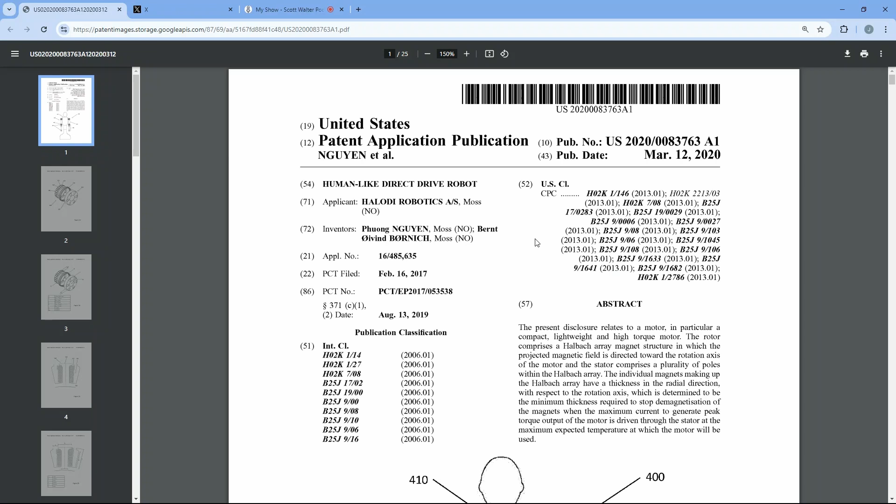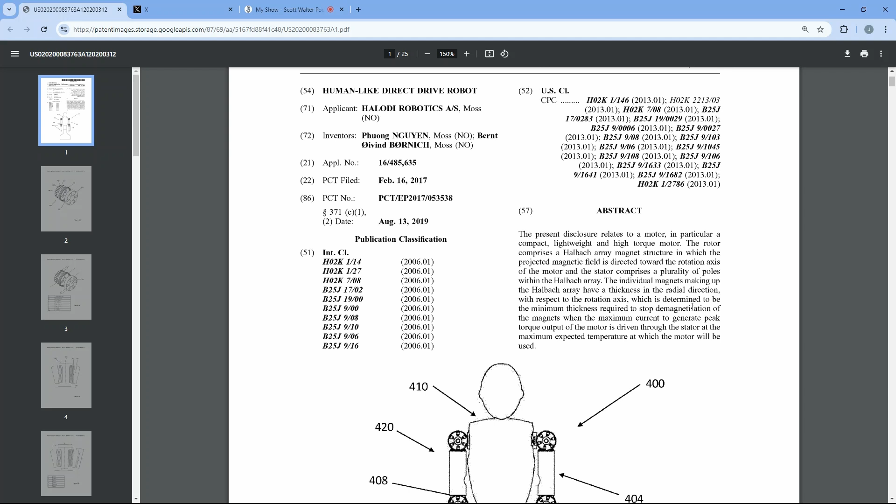Okay, so here we have the patent description, and it actually details quite a lot of different things. A lot of times the abstracts are kind of misleading - you get one idea of what's going on, and it turns out there's even more description than just the abstract. So the first thing they do is show an outline of what a humanoid bot would look like, and get into a description of a lot of figures looking at the actuators.

So they really go in and describe what they mean by a direct drive actuator. Direct drive, you would think, means there's no gears in there - but they're talking about anyone with a gear ratio below 1 to 10. I believe their gear ratios are much less than that, maybe like 1 to 2 or 1 to 3 or something. So it's like, well, that means you've got some sort of transmission or gearing in there. There's other ways to get a quote 'gear ratio' that doesn't require gears, which I think we're going to see in a minute.

But the main thing is they're trying to come up with a high torque actuator, using both a rotor and stator where they have permanent magnets, trying to figure out the best way to configure this to make it as efficient as possible. So they go into a big description of how you have to set up the magnets and everything, and what thickness the magnets have to be to make sure you don't get demagnetization - because if the motor runs too hot, your permanent magnets may lose magnetization, demagnetize on you, and then it doesn't work anymore. So you've got to have controls to make sure the thickness is enough that this doesn't happen.

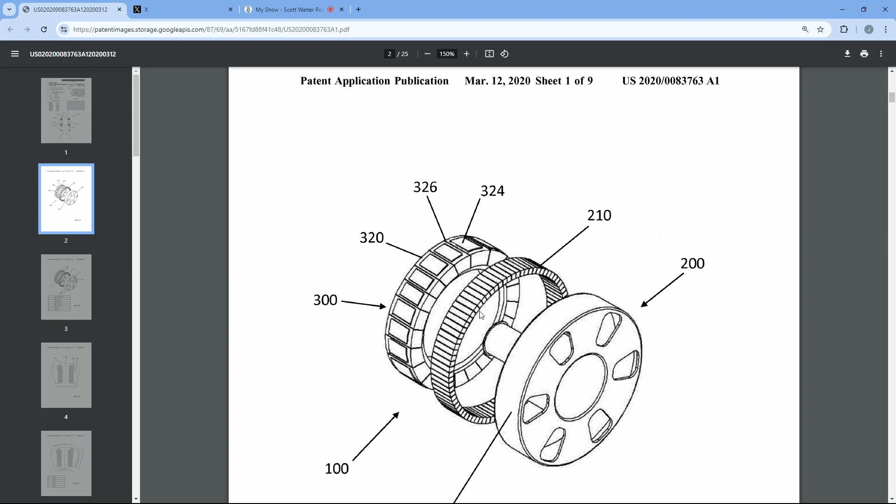One of the tricks they've done is they're using for their rotor something called a Halbach array. The Halbach array is basically, if you take a bunch of small permanent magnets and stack them all together, you can create a much bigger magnetic field. And the magnetic field is going to be on both sides of that strip - so basically you're aligning north to south, north to south, north to south, all the way along there.

A lot of the magnetic field ends up on one side where you don't really need it. You'd like to get it all on the other side. It turns out if you take permanent magnets and rotate them about 45 degrees when you stick them together, so it's not north to south pole but off a little, you end up creating a stronger magnetic field on one side of the plane than the other. That's the idea of a Halbach array.

Another problem they have to worry about is that most high gear ratio motors get their torque by spinning at a very high RPM and going through a differential of 1 to 100 to get really high torque. Because of that, the magnetic field looks very smooth to the spinning motor. But when a motor is spinning really slowly, the magnetic field is kind of lumpy, not perfect all the way around. It's more like a sinusoidal wave.

If you look at it, it almost looks like a gear, and so you get these two different magnetic fields trying to push against each other. It's not pushing smoothly - there's a little bit of catching, and as you get moving a particular way it'll pick up, but it's not a smooth torque. This effect is called cogging, almost like thinking of gears and cogs in a wheel where things stick.

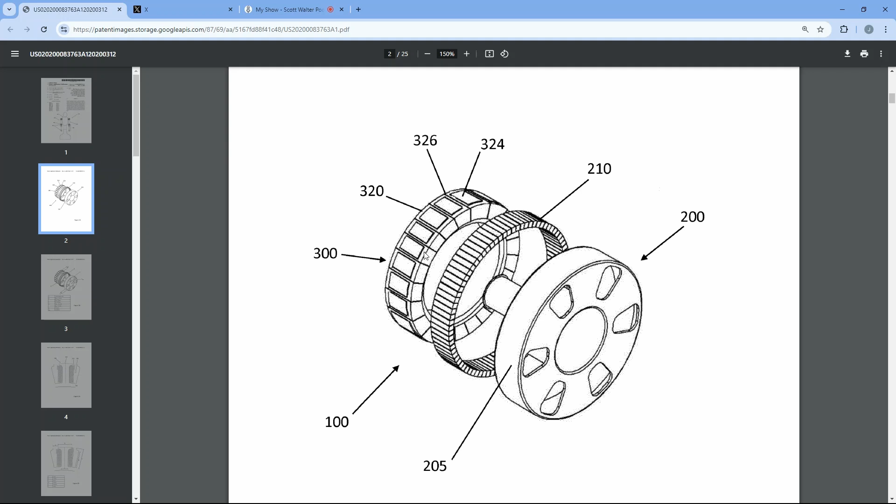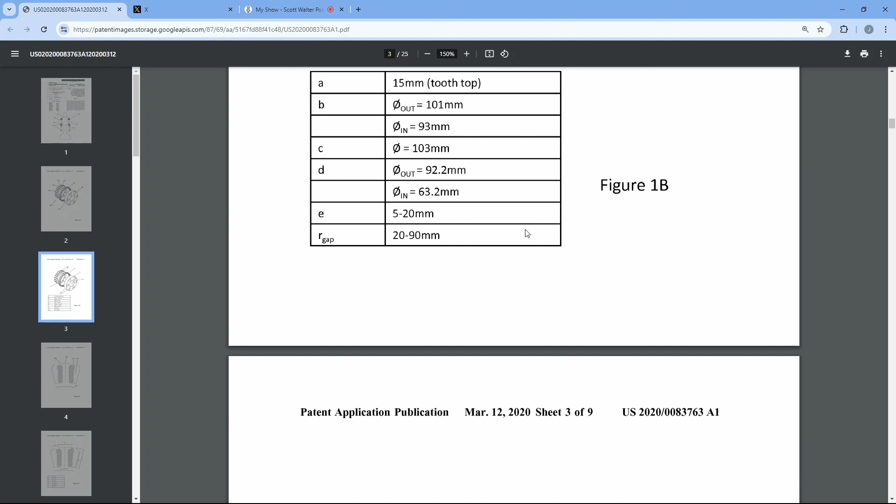They go through a lot of the different designs they tried, to make sure they come up with the optimized set of magnets and radii and amount of material to get the actual torque they want to have.

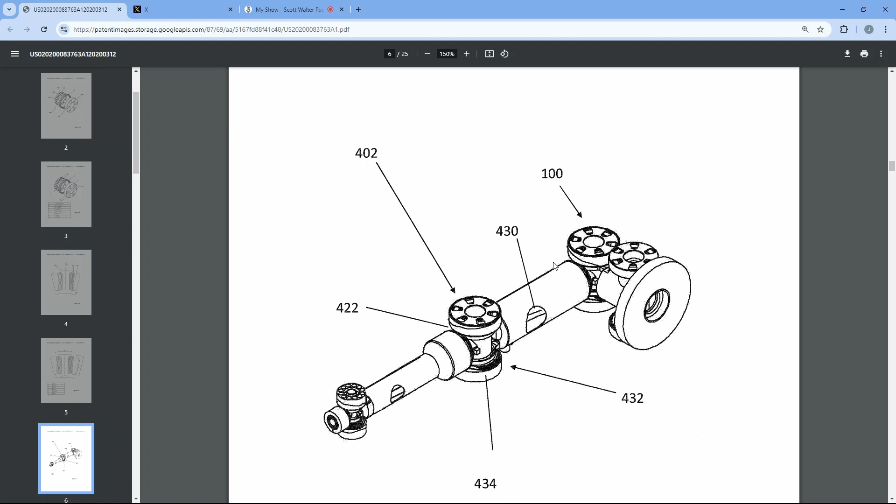At some point there are more details on exactly what they need to do in the stator, how the windings are done. Anyone with a good degree in double E will probably understand a lot of it. But the main diagram I focus on is: okay, how do they actually arrange these things to make the arm move? What's the arrangement going on here?

This is what's typical in a lot of patents - a graphic they put in which reveals just enough information to receive the patent, but not too much for anyone to really figure out what's going on. So you have to look behind the scenes to get an idea and try to imagine what's going on. There's a description of everything going on here, and I'm going to show a 3D mock-up of this.

The first thing I want everyone to see is, over here where my cursor is spinning around, this is where the shoulder is. Then here are two actuators - this is not a joint, these are actual actuators, a top actuator and a bottom actuator, that using a tendon drive will actuate this particular joint over here. This joint consists of 2 degrees of freedom: one going vertical along here and the other one along here.

It's kind of hard to understand in my description alone, which is why I'm going to build a 3D model to go along with it.

But the big thing is that where you think the joints are, or if you think there's a motor driving it at the joint, you were wrong. It's actually driving the next one. And we're going to see a lot of the advantages of being able to do something like that.

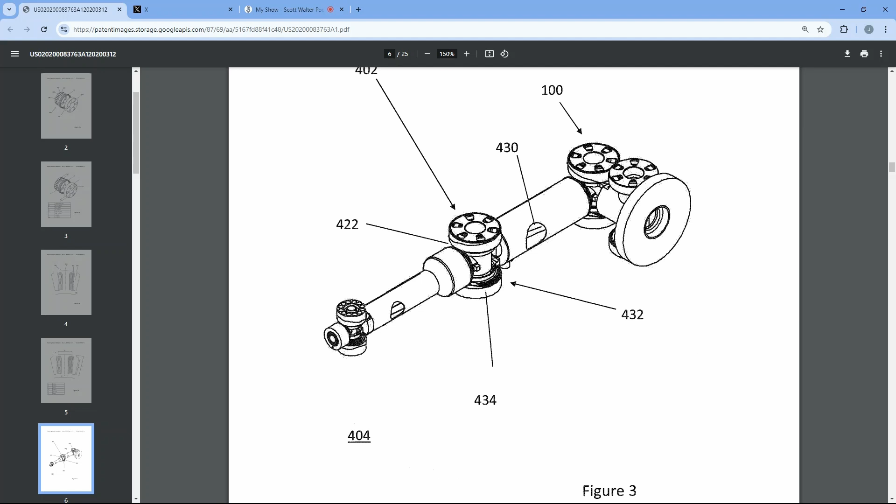So now what I want to do is switch over to a 3D model. Let me just stop for a second here. I'm going to bring the model up right now. So I took this in there to get an idea of what's going on.

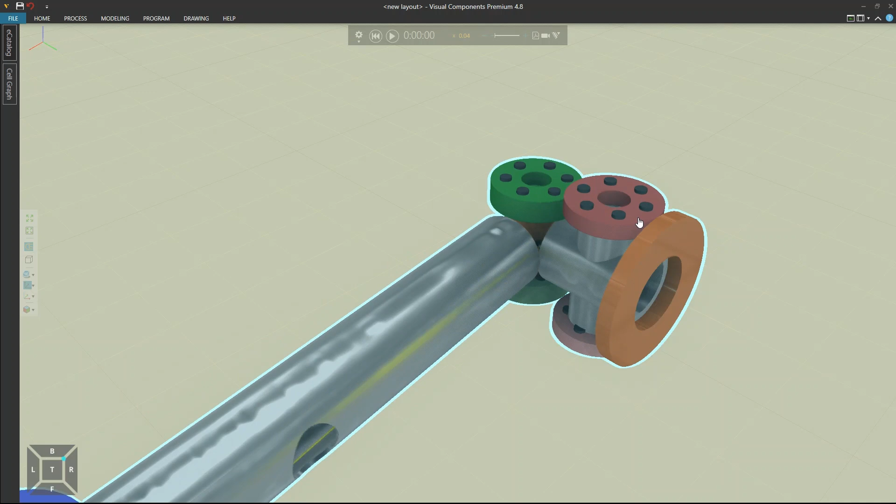So again, if we look up here, I have this pair of red actuators, top and bottom, which are going to actually cause the motion over here on the shoulder joint. And what happens is you can move this particular motor, and it's actually connected to what looks like this joint here.

Now you see this green, what looks like an actuator moving there. Well, the actuator isn't actually moving. What's happening is the joint is moving at that point. It's causing the joint to move, and it's being done because of the tendons that go through a series of pulleys here to make that move.

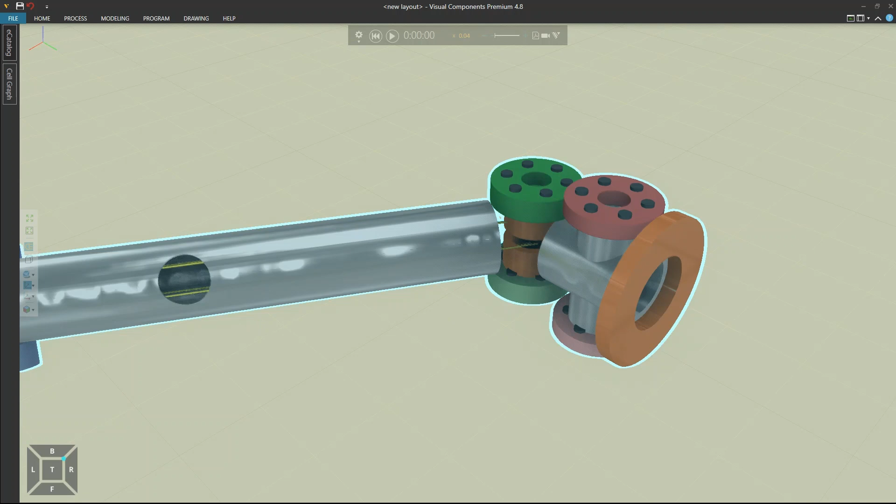Now, depending upon the kind of movement you do, if you just move one of these motors, you'll get kind of a compound movement. There's some other magic going on here that's not fully modeled. But basically, if you synchronize both of these red motors, the dark red at the top and the light one at the bottom, so they both move together as they go around this spool here, it causes the arm to do a pitching movement.

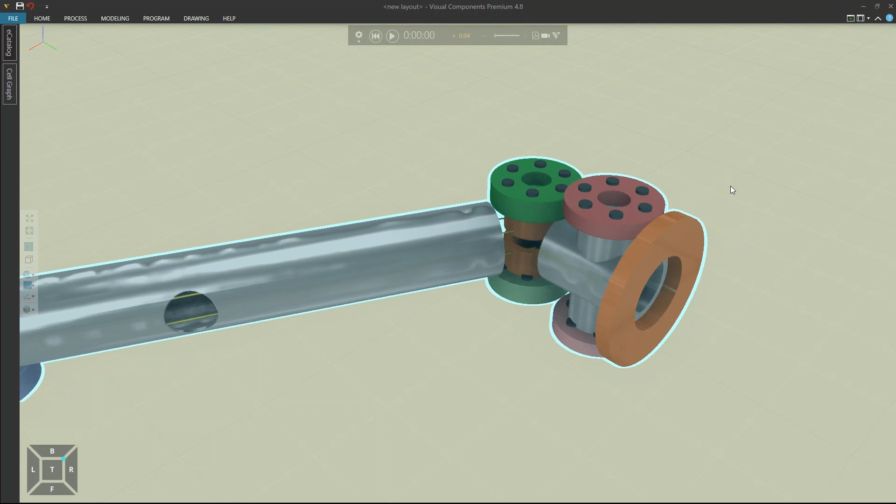If I set it up so that these two motors actually move counter to each other, so when one goes clockwise, the other goes counterclockwise, set it up right, what you will see is that when they go in the opposite direction, they cause this to roll.

So yeah, the motor for actuating this joint is not here, it's here, it's not there. The green motor is actually what is used to actuate the elbow.

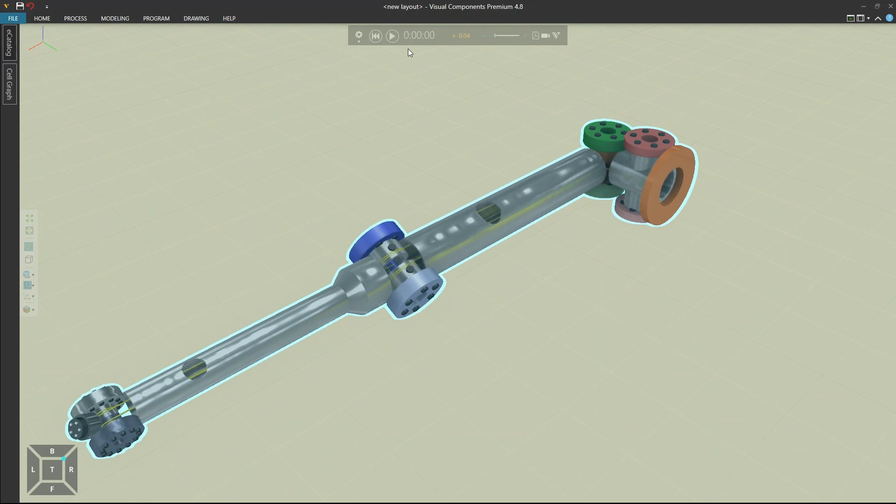So now I'm going to take the green motor here, and the top is going to move clockwise and the other one counterclockwise. And you'll see what ends up happening is like you're expecting movement here, you're getting movement way down here. So you see when they go opposite, it causes the wrist to roll.

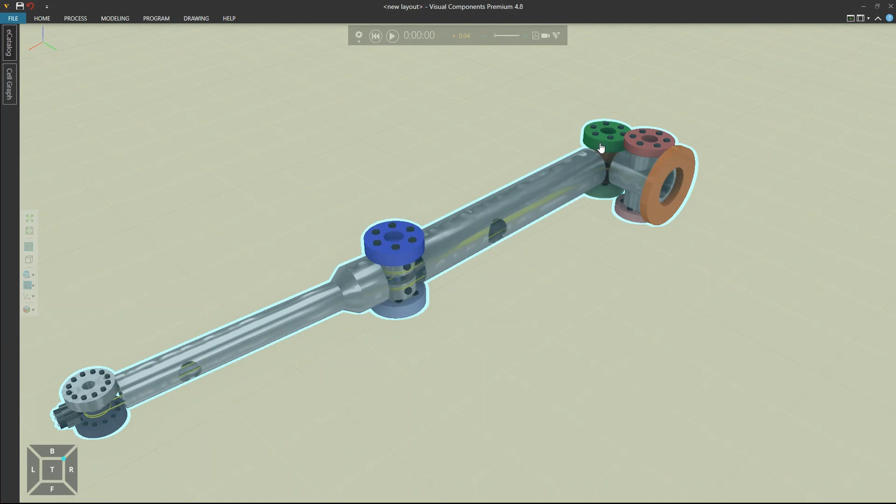And when they go synchronized together, it actually causes the elbow to move up and down. Basically they have a split joint here where the tendon that's wrapped around the actuator up here comes down and gets wrapped around this. And if it only pulls on this one, only that one's going to rotate and you don't get the full rotation—it causes it to roll about this axis.

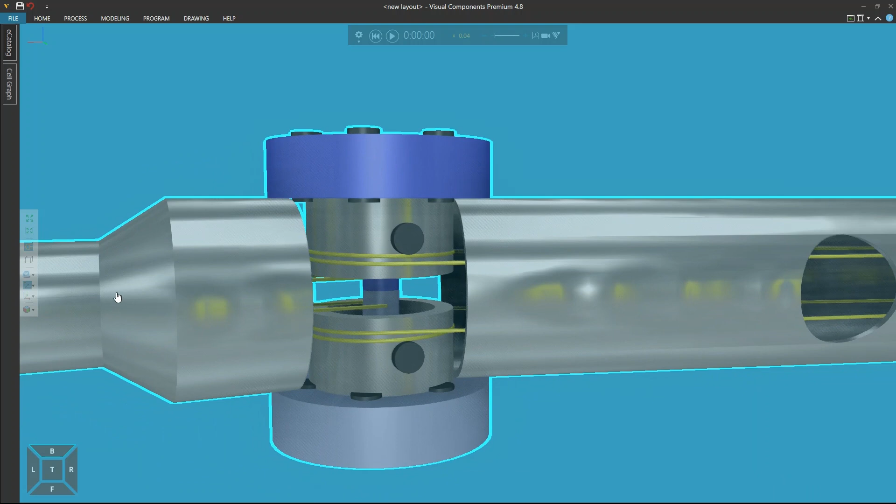But if both actuators are pulling together, that is how you get the pitching motion. So again, they both go together, and it's like, okay, these two tendons are pulling on there together.

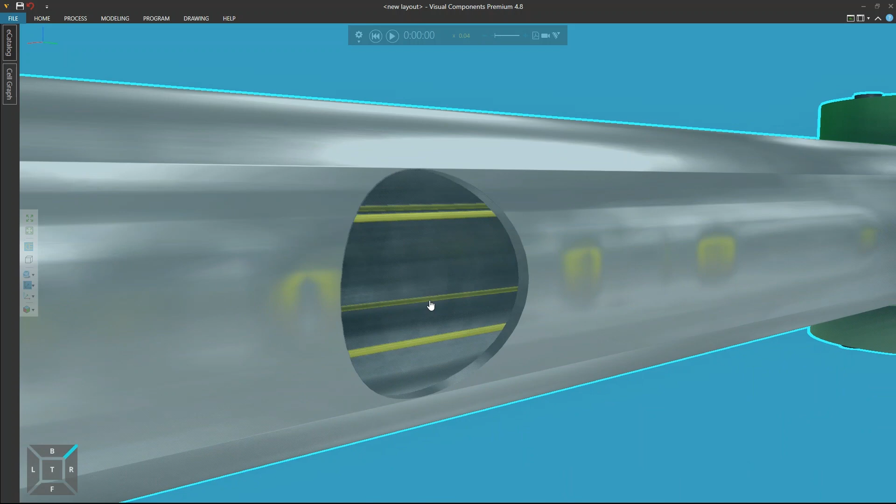Now, to go the opposite direction, because remember the problem with tendons—they only work in tension, they don't work in compression—you've got a second set on the other side. You'd say, oh, there's some on the other side that are wrapped around the pulley the other way, so that when I go in the counter direction, I get the counter tension.

And the way I'd like to describe that is like anyone's had horseback riding—you get the two reins in your hands, and if you tug on the right rein, the horse's head moves in one direction, but you let the left one go loose. If you want the head to go the other direction, you pull on that and let the other one loose. It's not like you can push on one of the reins to make the head move. You need two to be able to go left and to go right. And that's the same thing.

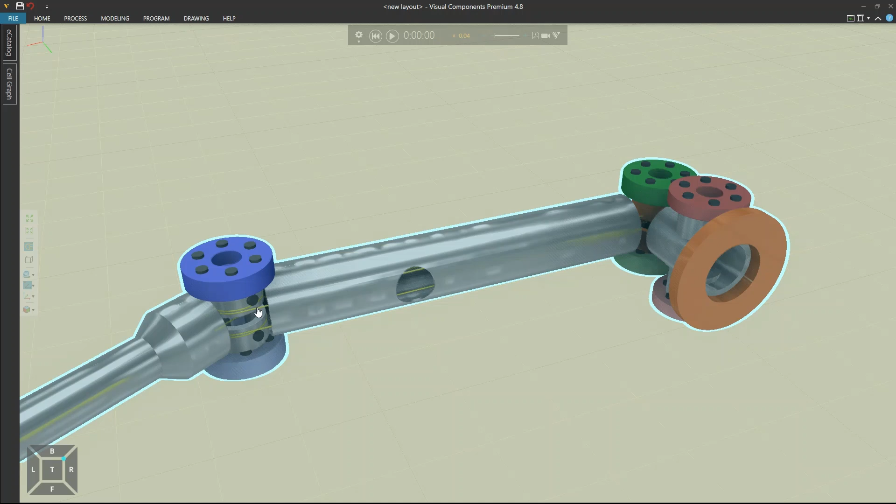So just think about it—you pull on one side, you'll get it to rotate. And if you get this split drum down here to go in opposite directions, they have some other pulling mechanisms in here. So there's still a little bit more going on that's able to take that motion and convert that linear motion into a rotational motion along there.

Okay, so you'll see that this is a very interesting kind of design.

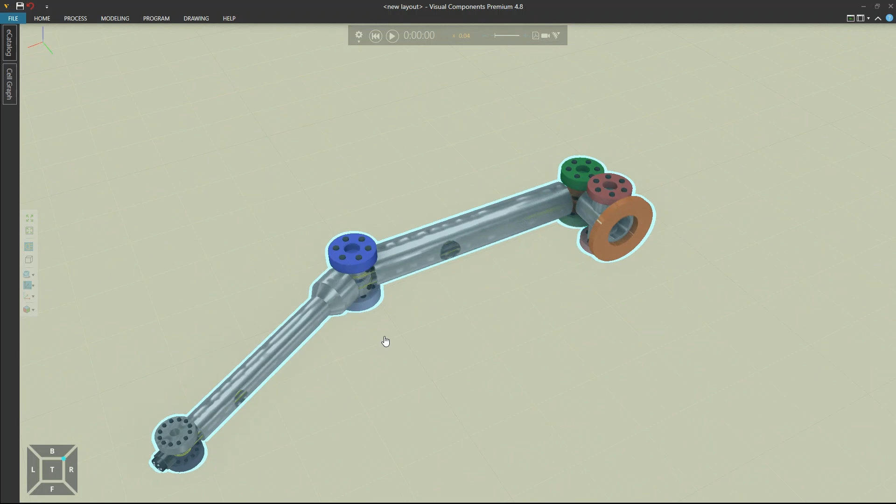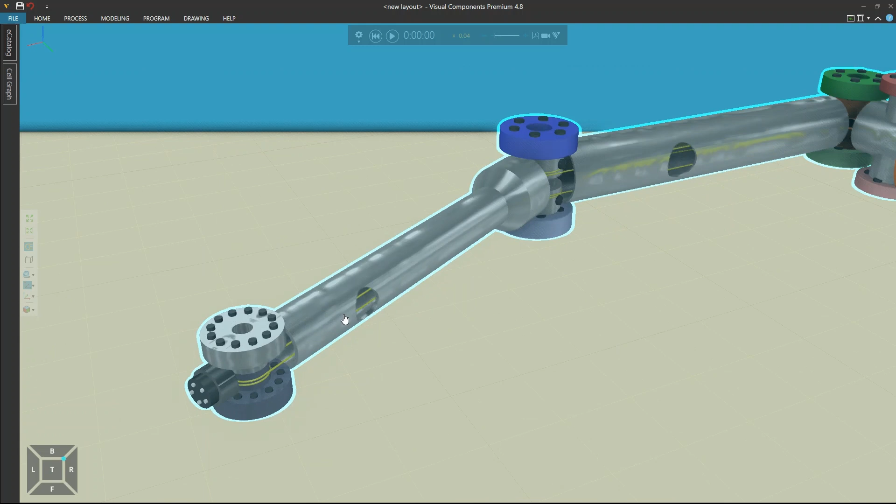If we take it one step further here, we now have the wrist down here. The way we get movement on the wrist is that the blue motors up here move. If I move these synchronized together, I get the wrist pitching motion. And if I switch it over to opposite motion, clockwise and counterclockwise, this very end here rotates, which gives you the yawing motion of your wrist.

Now, if you look at the wrist, you'll say, oh, there's motors here in the wrist. Nope, there are no actuators here at the wrist. It's just this assembly that converts the movement coming from the elbow. And the joint that forms the elbow is not the actuators either—there's a separate joint in there for the elbow, and it turns out that's a convenient place to put the wrist actuators down.

So what does that mean?

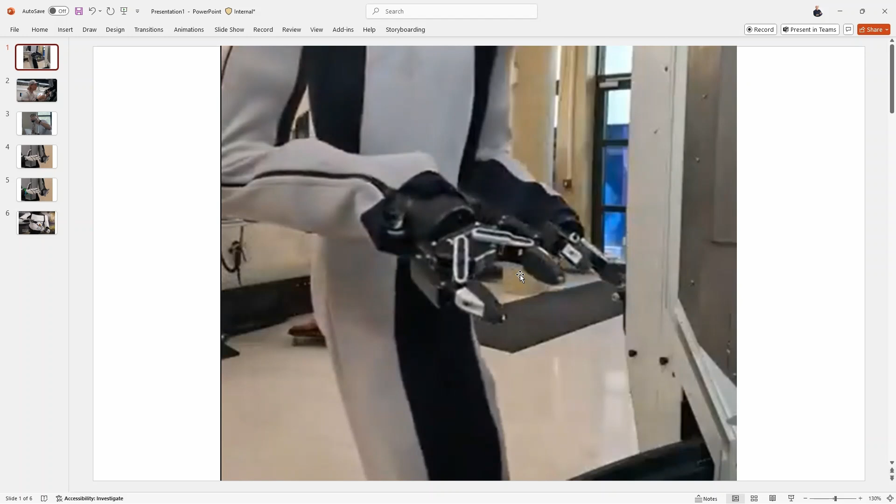This means we've been able to uncover a bit of what they've been doing. The original EveBot just had a very simple gripper, an off-the-shelf gripper from a company in Quebec called Robotiq, with parallel paddles that could come down to grab things. They went from there to the next generation bot, but they wanted to hide the IP by blurring this thing out in the S3 documentary, so we don't really have a good idea of what's going on there—we can't see too closely.

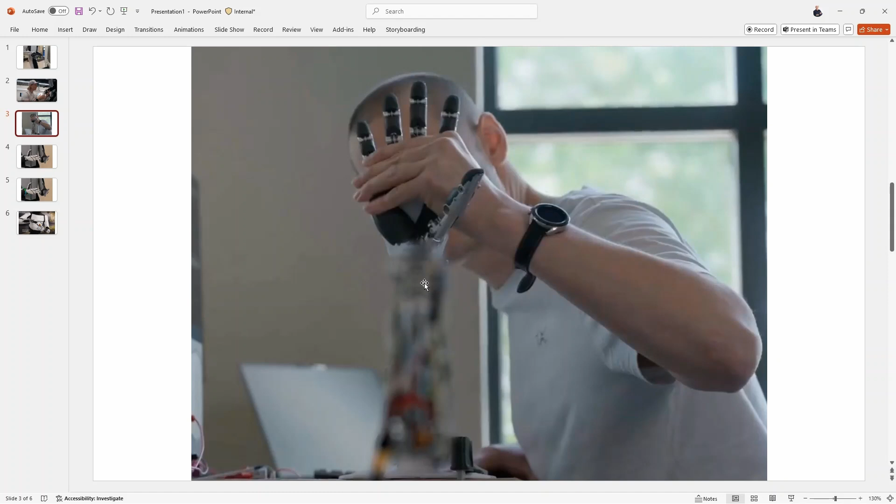And in one of the other images showing the hand, it's the same thing, because there's more going on here than just the wrist—there's also a lot going on with the fingers and the actuators in there. That's a completely different topic we can talk about after the tendon controls of the wrist. So they've come up with this hand, and this is a clip from their teaser where we can see a little of what that wrist joint looks like.

Again, it kind of looks like what we're seeing in the patent, and I've annotated it a bit so you can understand this. Does that make sense? Absolutely fascinating.

Wow, I can see some cables also. This is cable, you can see these white cables. I think we might be seeing something—it's hard to tell.

So here we have this joint, the first green joint, which causes the pitching motion—that's the axis of rotation along there. And then you'll see this other one I highlighted in blue, which gives you the yawing back and forth.

Now, the pitching motion of your hand is the most important movement—you want almost plus or minus 90 there. The yawing motion is not as important; plus or minus 30 or 45 is all you need. In some ways, the way this is set together seems more favorable to the green rotation than the blue rotation, which is fine—it's exactly what we want. We don't need plus or minus 90 in the yaw. So if it looks like the hand's going to self-impact if it moves too far, that's okay, because we can't really move our hands back and forth that way that much.

We can in the pitching direction. Now, if you look at the design of this wrist, it's kind of like a Cardan joint, or a type of universal joint where you have two axes that intersect like that. It's also a very similar kind of joint to what you see in the Optimus wrist from Tesla.

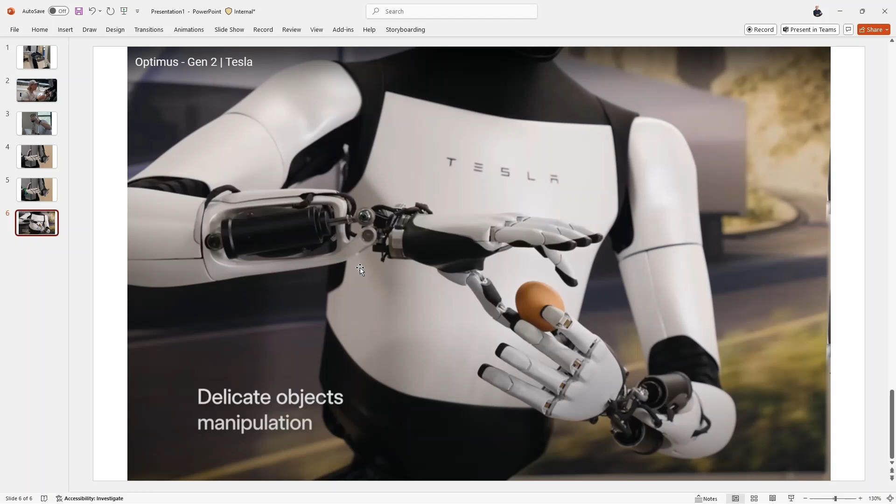So there's not a whole lot of room, which means that 1X has already figured out how to do that. Yeah.

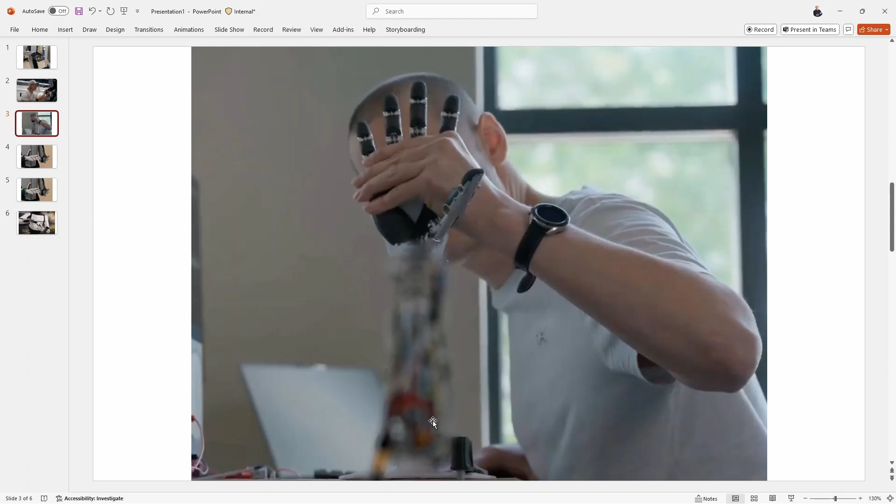Okay, because they actually have one more degree of freedom. They're probably a 23 degree of freedom hand versus a 22 from Tesla, because they have one extra joint in the thumb. I shouldn't say they have one extra - Tesla has one less, because we actually have 3 knuckles. So this is more anatomically correct, the hand that 1X has here. And somehow they've managed in this very thin area to be able to fit the actuators they need for the hand. And then cleverly, by moving things back to the elbow, they don't have to worry about where the actuators are going to be for the wrist. Oh, it just goes back a little bit further, and that's fine.

It's you've got at least 7 actuators in there, and those actuators have to wind up these cables, which are going to be the tendons. Now, they only need to have like one direction, because basically everyone's hands - and we can even see it when we look closely here - is that they have torsion springs in the joints of all the knuckles. So when you release the tension, it's just going to pop open. So you don't need to have a second tendon to kind of pull it back the other way. And that's kind of how our hands basically work. We've got a lot of strength in clench, but not a whole lot for opening it up. So that's fine. So they just need to be able to kind of wind it up and release it.

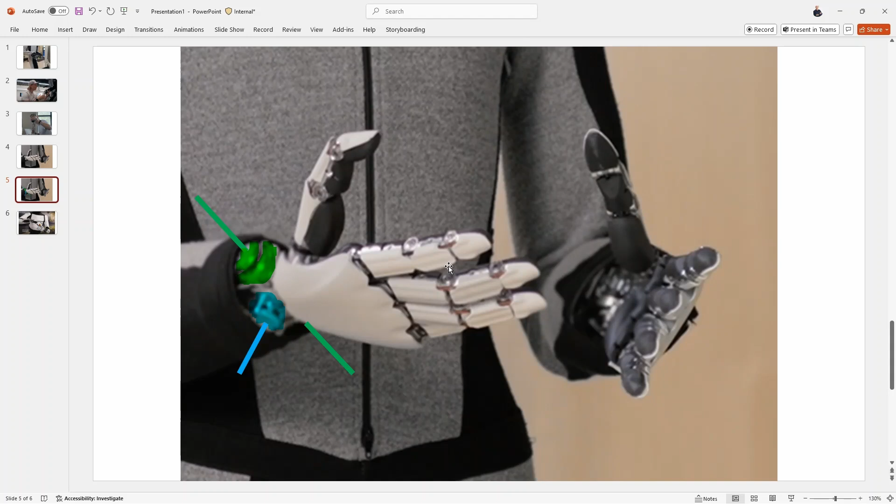So they're either taking those tendons and winding it on some little drum to bring it in, the same way that you would do with a fishing line, or they've got something that's just pulling on it. So, maybe they have a really compact set of compact linear drives that are about like a pencil - maybe very long, but very thin - that's just able to pull something a distance of 1 or 2 inches, or 5 or 6 centimeters, something like that, because that's about all you need to get the fingers to go down. You don't need to have an infinite amount of travel. You just need a short amount to get the fingers to close and to do that. So they could have a very interesting actuator design there. So I'm speculating here - I have no other information to tell me otherwise, except that it's a very, very sleek forearm that you're doing a lot of things with.

Very interesting. And I'm curious, where do you think this design could fail? Like if you think about the limitations in this design, can you guess it a little bit? Okay, yeah.

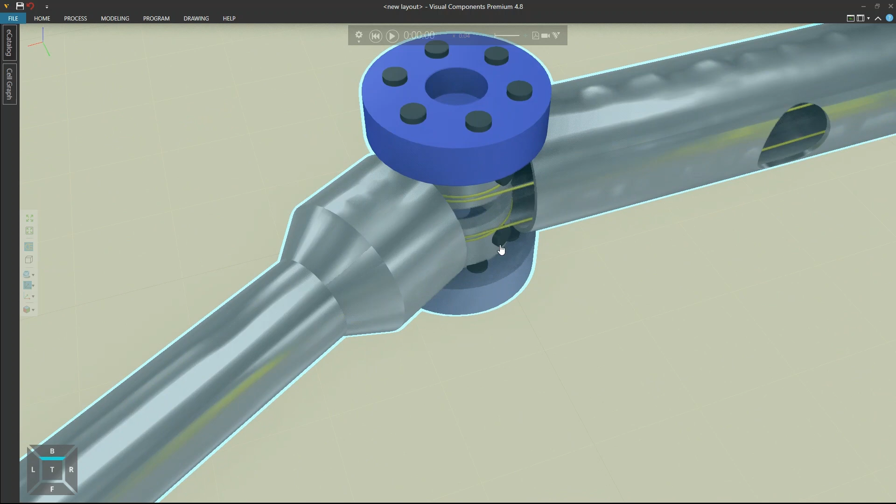Part of it, the first thing everyone would point out is the tendons - those things are going to wear out. That's what everyone would be worried about. In the patent, they talk about using a synthetic woven fiber, most likely Vectran. Vectran is very durable, I think even tougher than Kevlar. So if you pick the right material, it should work very well.

It's not going to be metal because the problem with metal tendons is they don't wrap around spools very well - you end up getting a lot of metal fatigue over time. So you need a material which hopefully doesn't stretch. That's what everyone's going to say, stretching is going to be a problem. This stuff doesn't stretch, and it rolls around these things really well without creating a lot of friction. It's almost the ideal material for doing something like this.

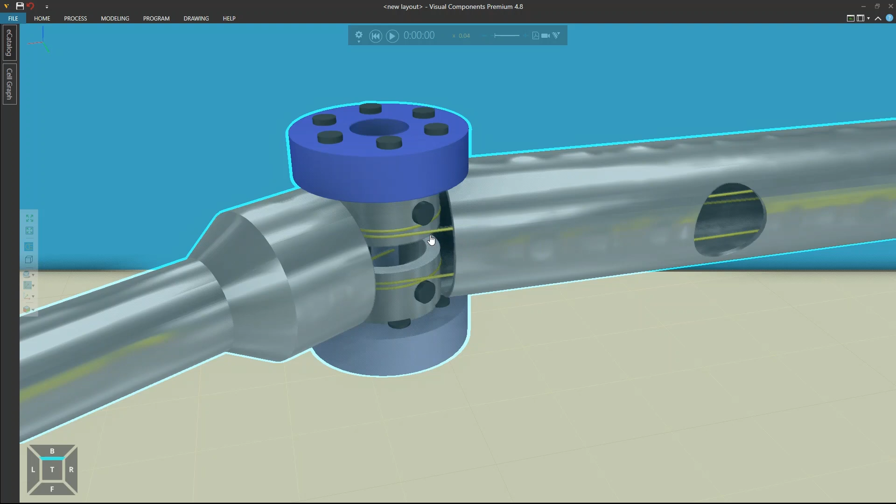And of course, it's very light, so you can do that. And the fact that you couple this with machine learning allows you to adapt for everything going on, what's needed to control your system. So in many ways, you might say tendon drive is going to have all kinds of problems.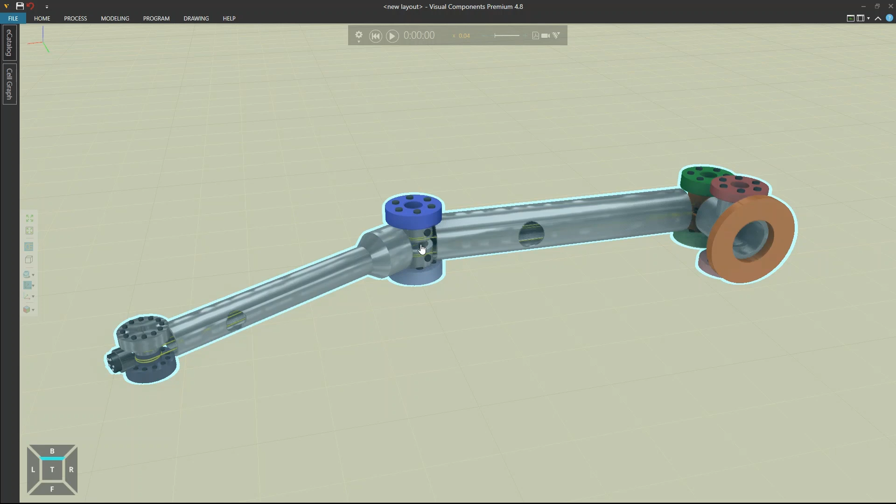The tendons are going to snap, they're going to stretch, they're going to lose calibration and do all this. But I think they found a lot of ways of getting around that and are able to do things with pretty good accuracy. And again, the amount of power they're consuming compared to other bots out there is really a fraction - they're incredibly efficient.

And we know they're efficient because you don't hear anything. When you're hearing the noises of actuators, what you're hearing is loss, you're hearing inefficiency. And if you don't hear anything, that means all the energy is going into the movement like it's supposed to. Now there's one other thing that's clever about this.

Remember, we want to reduce the overall mass. One way to reduce the overall mass is to make your actuators lighter and tighter, if you can do that. But the other thing is to find some way to reduce the torque requirements of the motors in the first place.

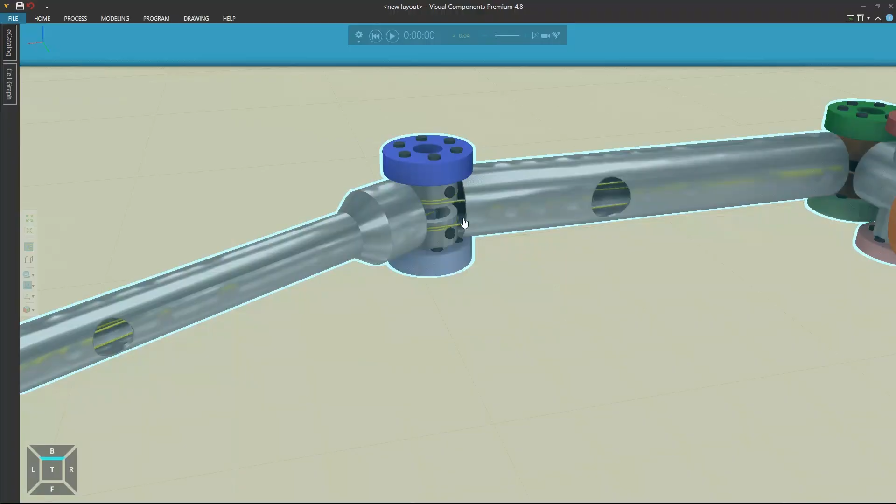I think I need to get the sharing back on here for a second. I'll do a little bit of a look into what we have to get an idea of what's happening.

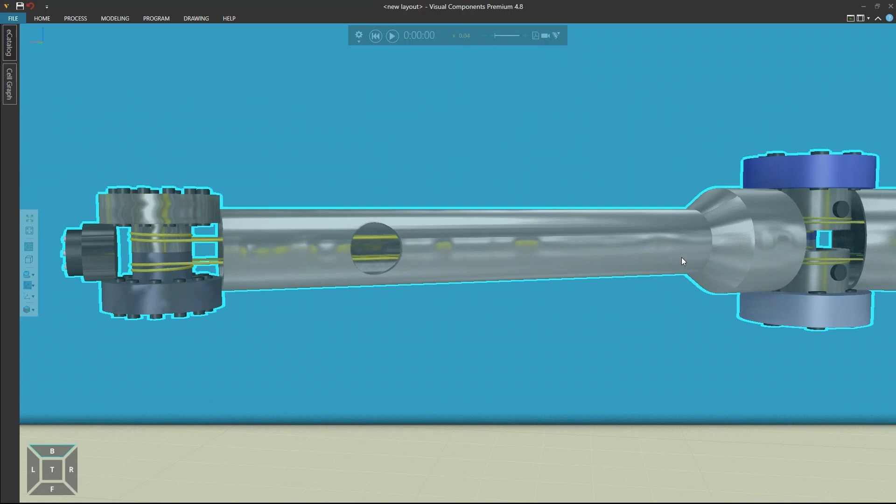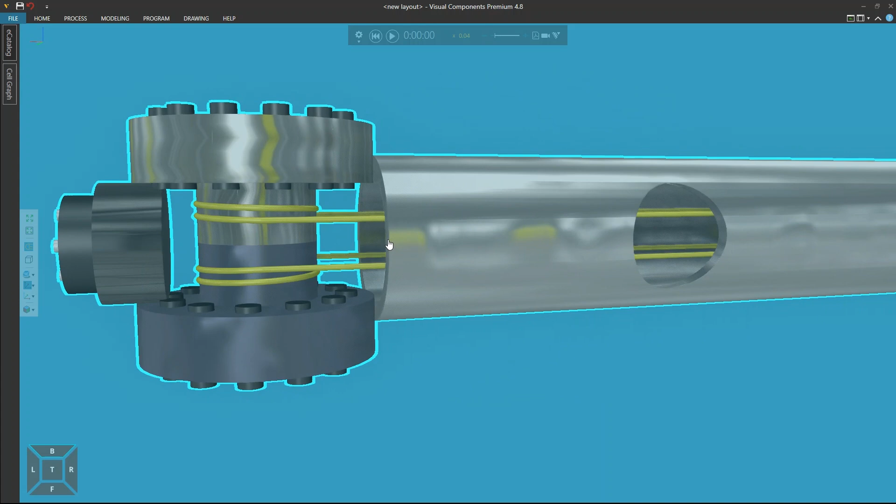The fact that they have different diameters means they're going to have different gear ratios, so you can see a bit that I've put the gear ratio in there. As I move this actuator - let me set it into synchronization mode - you'll see that as I move this one, it has to move a lot in order to get the full movement here. So I put in a gear ratio of like 2-to-1, something like that, it could be 3-to-1 or 2-to-1. So this might move such that when it moves 90 degrees, you only get 45 degrees of movement down here. So it's a bit of a gear ratio, but it's not much.

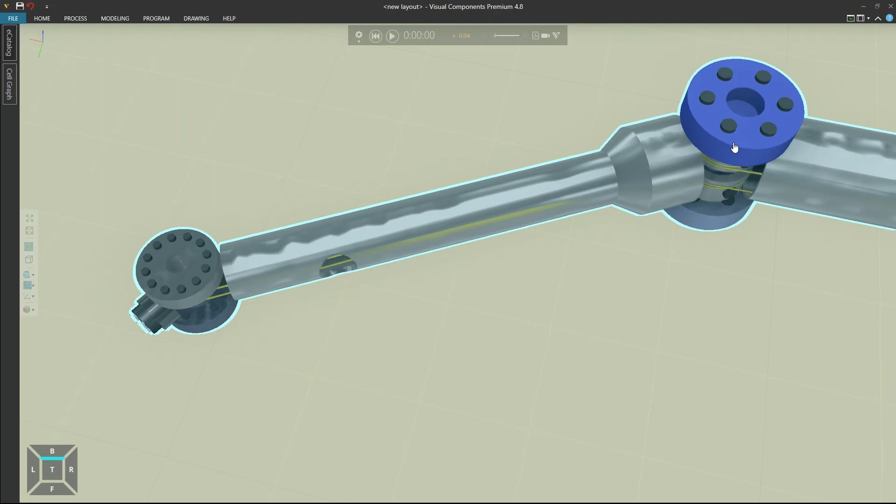As Bernd has said, this allows you to get torque transparency - you actually understand what the forces and torques are that are being applied at that joint, so your control system can adapt properly to understand what's going on. But when you have a really high gear ratio, you end up losing that transparency and don't quite understand what it is that you have to do to control your system. So that's some of the clever things they've done.

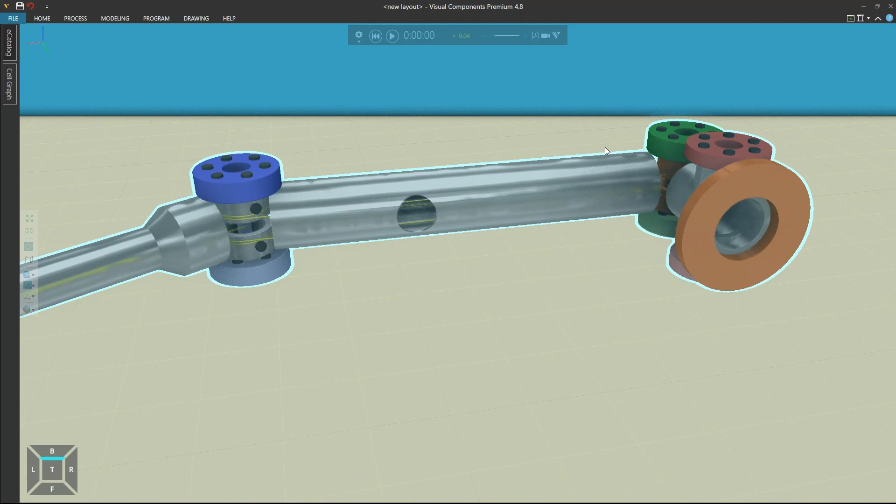What I've shown here is that magically, when these things move in opposite directions, you get opposite movement out here. So if I'm moving this, you'll see the opposite movement here is causing this rotation there - actually, it's easier to demonstrate it up here. So when I'm moving the green ones in opposite directions, you'll see it's making this entire forearm rotate.

You might wonder, well, how exactly does it do that? They've got something going on in here, there's probably some other tendons and a few other things converting this movement, allowing that motion to happen. So there's still a secret hidden in there, not quite revealed in the patent. It's discussed with basically a word salad when you're trying to understand it. This part here is pretty obvious, but the other part, not so much how they're doing it.

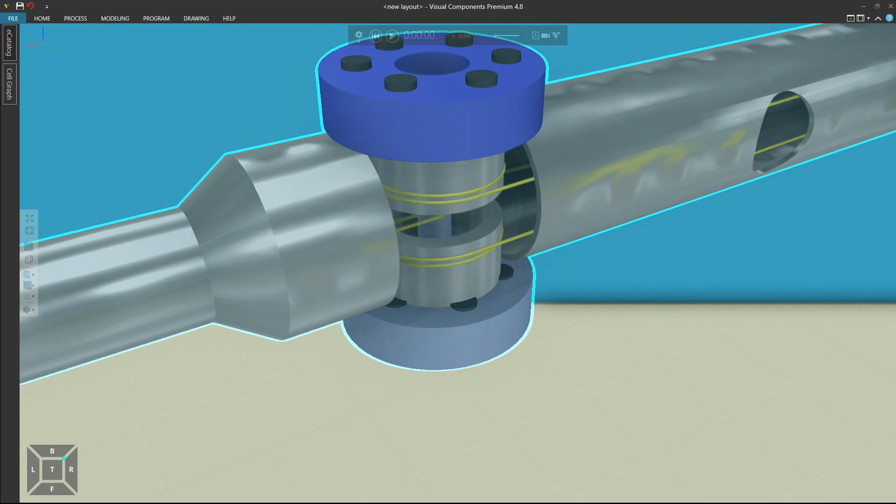Someday everyone will find out. I'm sure when they eventually get a robot, someone will disassemble it and take a look. I appreciate the hard work you've done there.

Maybe the question I would... That wasn't hard work, that was fun.

For you it's fun, but for me I'm impressed by your level of dedication, just to explain what's happening there, because they try to hide it as much as they can. But maybe the question I'd like to ask, since you interviewed the Figure CEO and others, is why didn't they do the same approach? If we talk about Figure, why did they design it differently? Is it something they understand differently, or is it just not a common way of thinking about design, as much as 1X did? Where do you think others didn't take the same approach?

I think some of the approaches are different. We know that most of the North American robot vendors have chosen high gear ratios, whereas the Chinese bots are going for lower gear ratios, which is probably why they're able to get the walking a little bit better. It has a lot to do with torque transparency, which makes it easier for the control system to adapt. A lot comes down to the mentality of trying to make these actuators as small and as powerful as possible, and one way to do that is to get mechanical advantage through gear ratios. So that's maybe not quite outside the box thinking.